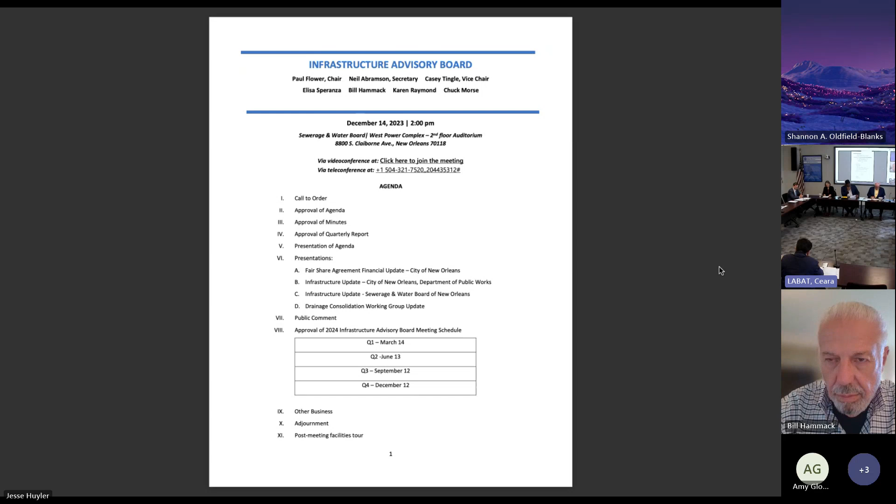Okay, so each of you has the agenda in front of you. If I could have an approval of the agenda. Move to approve. Moved. Second. Seconded, all in favor? Aye.

Aye, the agenda's approved. The meeting minutes are attached in your packet. They were sent out several days ago. I hope everybody's had a chance to read them. If there are no corrections or additions, are there?

And I'd entertain a motion to approve. I'm a motion to approve the minutes. Moved by Mr. Morse, seconded by Mr. Abramson. All in favor? Aye.

The minutes are approved. In addition, in your packet and also sent out to you a couple days ago was our third quarter 2023 quarterly report from the Infrastructure Advisory Board that goes to the mayor of the city, the city council, the governor by executive order. And we also send it to the local delegation, have started to send it to the local senators and representatives in our legislature.

Are there any comments, corrections, or additions to the quarterly report? If not, I'd entertain a motion to approve the quarterly report. So moved. Moved by Ms. Seconded. All in favor? Aye. Any opposed? No. Okay. So that takes care of those items.

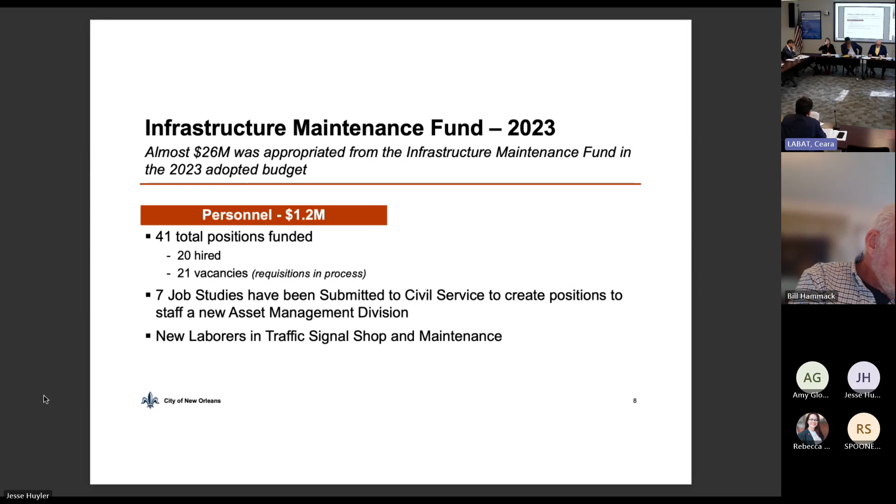A lot of these new laborers are in our traffic signal maintenance shop. If we move on to the next slide, we talk about actual projects we've been funding with the overall IMF dollars appropriated to DPW. Obviously the largest component here has been direct to Sewerage and Water Board. The rest primarily has been going to right-of-way repairs allocated out to each council district, and an additional $1.4 million of that IMF funding is going to improvements.

We can move on to the next slide for an update on the DDD drainage improvement. I know this is a project we've been talking about for a good long time now, and we have work that's actually been started and completed. We had to change the scope of work a little over time due to changes in cost estimates. Since this project was initially created pre-COVID, a lot of the city's construction costs have risen substantially, so in the end we're not able to get to as many blocks as we originally hoped.

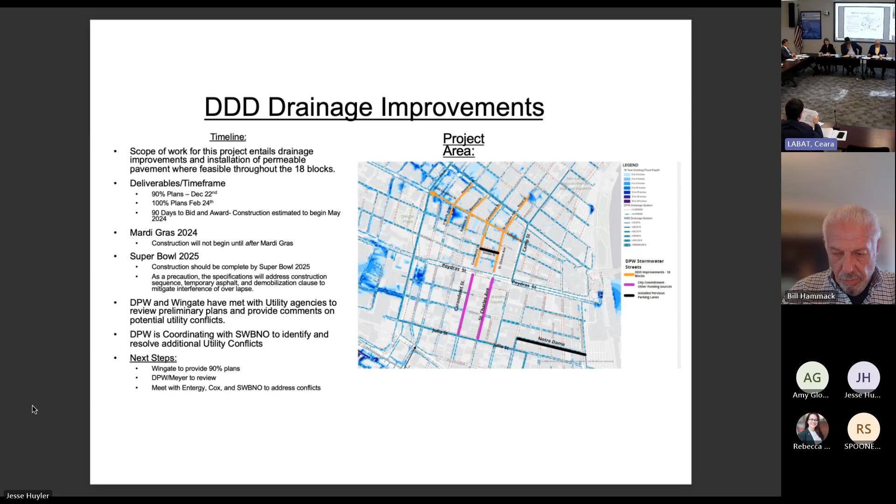Moving on, next slide. One of the hiccups that we've seen that have affected the budget for this project and how much we're actually able to get accomplished have been utility conflicts.

Some engineering drawings are going to show what we're talking about, but one of the largest issues we've seen are existing drainage lines in parking areas. One of the major things we're doing with this project is the parking lanes along those blocks are going to basically be used for water storage, permeable paving, and more or less that would be the correct way to describe it.

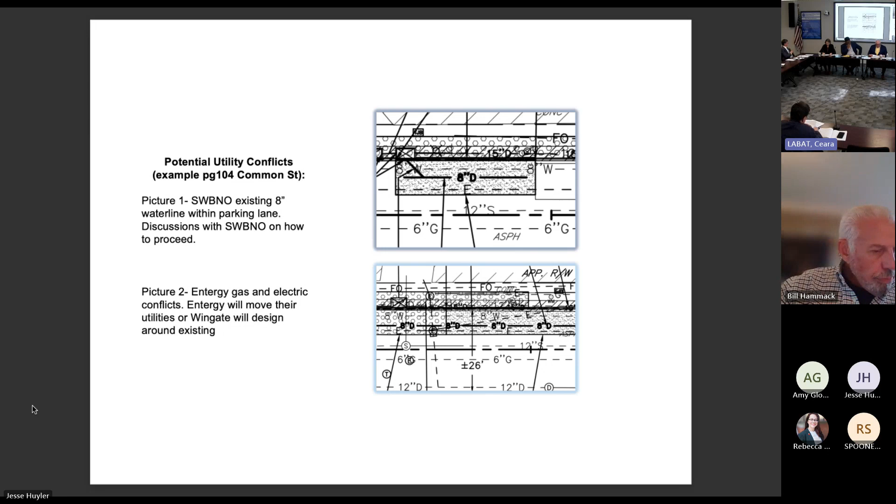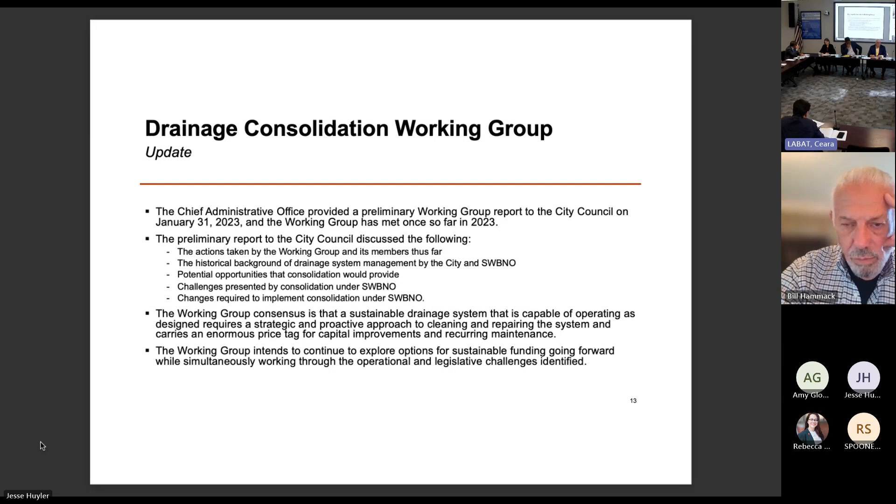We can move on to the last bit, which is the drainage consolidation working group. I don't really have any major updates here. I think the members of this board probably have pretty much the same knowledge of what we've been finishing with this. We haven't made any major changes since the last meeting, as far as we're aware. We have not met the board since the last meeting. With that, if there are any questions I can answer.

I have one quick question. Could you back up to the slide showing the allocations for certain projects in the various council districts? I'm absolutely amazed that I don't see anything in Oliver Thomas's district. District E is not included. As far as I know, this is the information that was provided directly from Joe Threat and DPW on the current status of the allocations here. I strongly recommend you don't show it to Oliver. I would agree.

I was at their board meeting last week, and we were talking about inclusion and equity in contracting for that particular job, because that's a perfect opportunity to make sure it's very inclusive. Oh, absolutely.

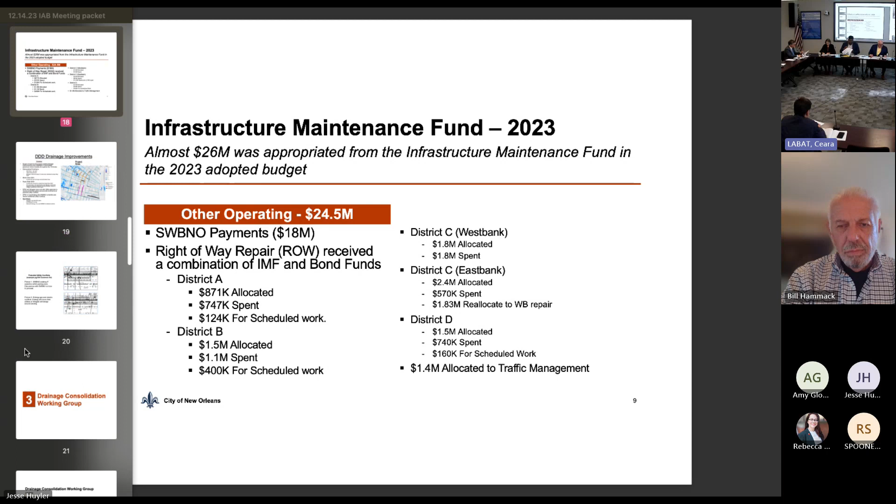Next is item 6C, I guess it is, the infrastructure update from the Sewerage and Water Board.

Thank you, Paul. Good afternoon, everybody. I'd like to start with a welcome and an apology. A welcome to our water plant, we've been really planning this for a while, so we're very excited and elated that you're all here and we get to see parts of the power complex at the conclusion of the meeting. I'm very sorry that Bill Hammack couldn't be here, but we'll make sure you get your own personal tour, Bill, at one point. The apology has to do with the lack of heat. Well, it's gotten better since I got here. Well, the more I speak, the warmer it's going to get.

Given the fact that we're here, I thought we'd take advantage of having more staff available and attending, so many will share the actual updates. So it's less me talking and more them being the subject matter experts. They're going to answer all the questions and speak from firsthand experience about what they've been doing. I think it's an awesome, unique opportunity today.

So with that, we're going to start with Grace Birch, our Director of Communication, to talk about some exciting initiatives she's working on. I echo Ghassan's sentiments. Welcome, everyone, it's so exciting to have everyone here at the plant.

Also exciting, tomorrow we're going to debut a beta version of our pumping and power dashboard. You all might remember we had a saltwater intrusion dashboard that was really successful. After the rain event on December 2nd, we feel ready to, at least in beta form, debut something that Steve Nelson has been championing. It's been a Herculean effort on our IT team and the engineering department to finally put in public form which pumping stations are operational during a high rain or anytime event.

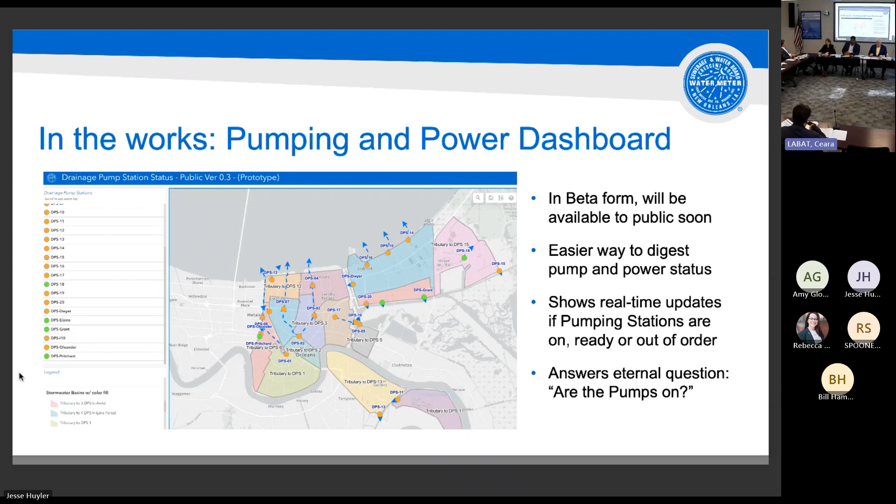We had a great meeting today with NOLA-ready, after talking with them extensively throughout the weeks about how we can better communicate with our partners internally, and give everyone internally that visual cue of where we're at with our pumping and power status.

And with that, Steve, if I missed anything, please.

You say you're in beta testing on the dashboard—when do you expect it to go online, or do you know? We're going to put the beta version online tomorrow. We might live to regret that, but we're going to let the public see where we're at now and get feedback from them.

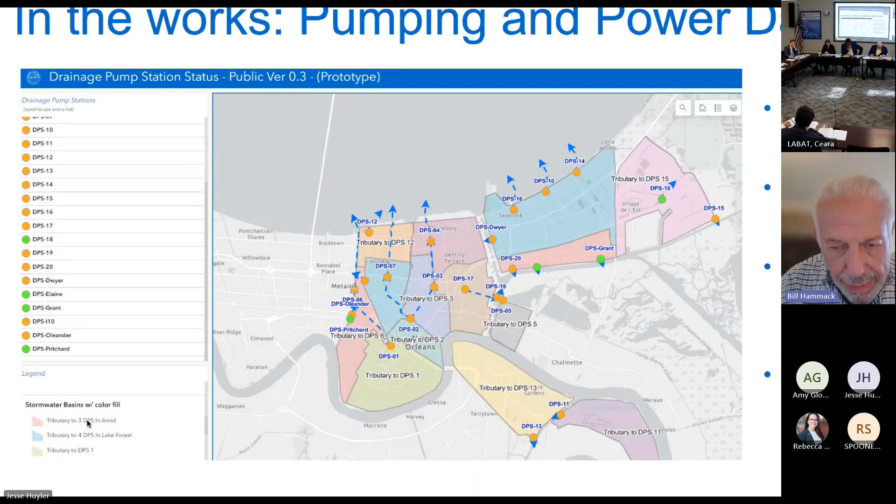Could you go back to the beta slide on the pumping? I tried to blow this up on my computer, but down on the lower left hand there's comments about tributary—am I saying that right, is that what that says? So this is prototype 0.3. We are on prototype 4 at the moment, so that will not be on the new one moving forward.

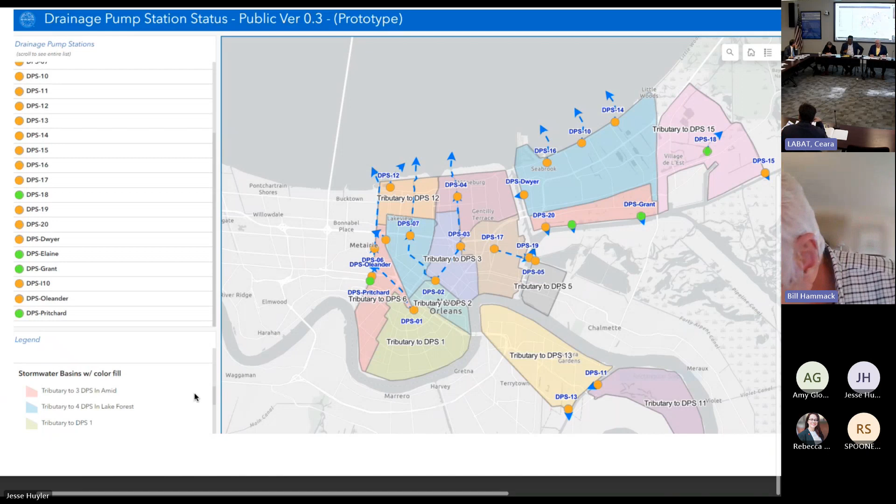My comment was, I don't think anybody looking at this as a layperson would understand what that meant—'tributary.' There'll be many disclaimers and tributary explanations. Even so, it does bring up the point that 'tributary' could be a little confusing too—it might be 'basin' or something more colloquial.

That's perfect feedback. When we first launched our saltwater dashboards, we got flooded with questions, and from that was born an excellent FAQ list. We expect that same thing to happen. Any changes we can make on the actual dashboard, we'll make, but any questions we can answer will live on that page as FAQs.

And that's only a screenshot, Bill. So when you blow it up on that screen, you won't be able to see anything, but the user will be able to blow it up and see exactly where their street is. It's a GIS map powered by Esri, so there's a lot of detail in that map.

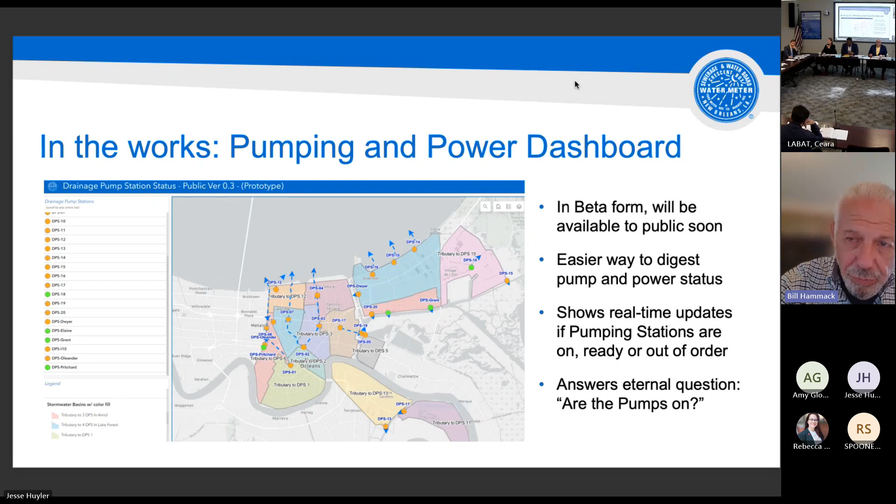I like it. Good for you, that's good. Bill, I was going to say that if they didn't change it, the engineers in the room could tell you what it is. That's my biggest concern, Paul.

Good feedback. On a communication standpoint, I don't know if it's Sewage and Water Board or the city, but I get all the alerts - NOLA Ready and Sewage and Water Board - every time there's a weather event, by email and phone, which is great, except it reminds me of the old hurricane alerts: evacuate, evacuate, evacuate, and nothing would happen. Then a big hurricane comes and people treat it like crying wolf and don't leave.

You can't really predict the weather, knowing exactly when it's going to flood and when it's not, but I have a feeling people are getting into that crying wolf scenario and don't react every time they get a notice, because in many instances nothing happens. We want people to take precautions when they get the notice, particularly if something bad happens. I don't know if there's a way to deal with it, but I mention it because it's happened before with hurricanes - people say 'oh, another notice' and stop taking it seriously.

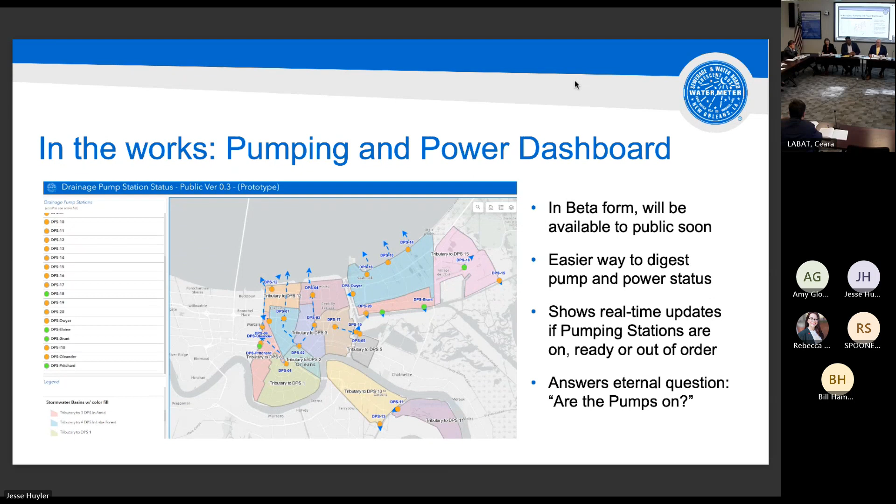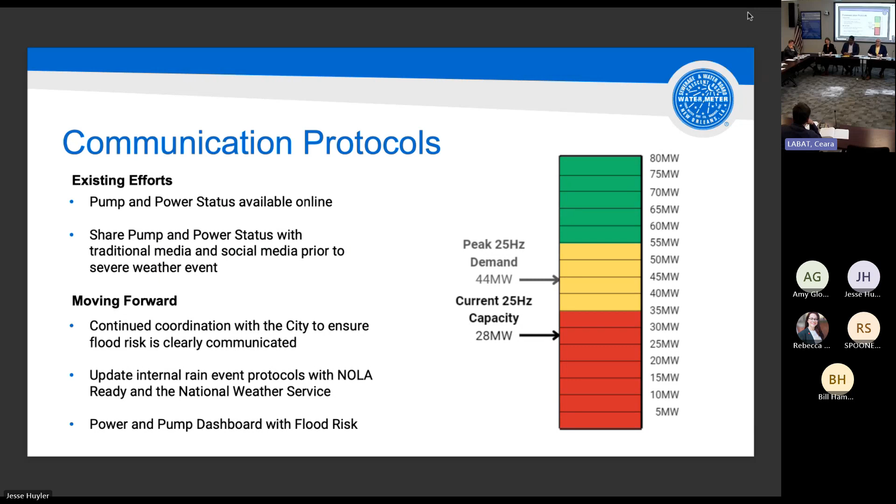My name is Caitlin Timrak. I am our Power Complex Program Lead, and I'm going to talk a little bit about our current power situation to expand on this and go over the Power Complex as well.

As Grace mentioned, we are in the final stages of bringing Turbine 5 back online. Our internal crews have been working diligently, nearly 7 days a week on this, and they've done a fantastic job. We should be bringing that unit online tomorrow. In any scenario, we'll be letting everybody know where we're at, and hopefully we'll be able to move up that chart a little bit.

In the meantime, as we have been and will continue to do, we have frequency changers throughout our system, in addition to several EMDs, which are 60 hertz generators at our facility here at the Carrollton Water Plant. Frequency changers are at a couple different locations across the city. They take power from Entergy or Turbine 6, should we need it, and convert that to 25 hertz. That's what we've been relying on daily for our pumping at the moment.

One question that comes up is, can you just go buy more generators? We actually asked this question to partners and suppliers, and they more or less confirmed that there are no 25 hertz generators available on the market, at least in this country, possibly this hemisphere. So if we did, it would have to be custom fabricated and designed. Generators that were bought after that.

That's what I'm referring to when we say EMDs. There's 5 units, installed in the back of our plant, 3 of which are operational at this moment. Two are out of service, but we have been using them, and we used them last weekend. And yes, they are 60 hertz.

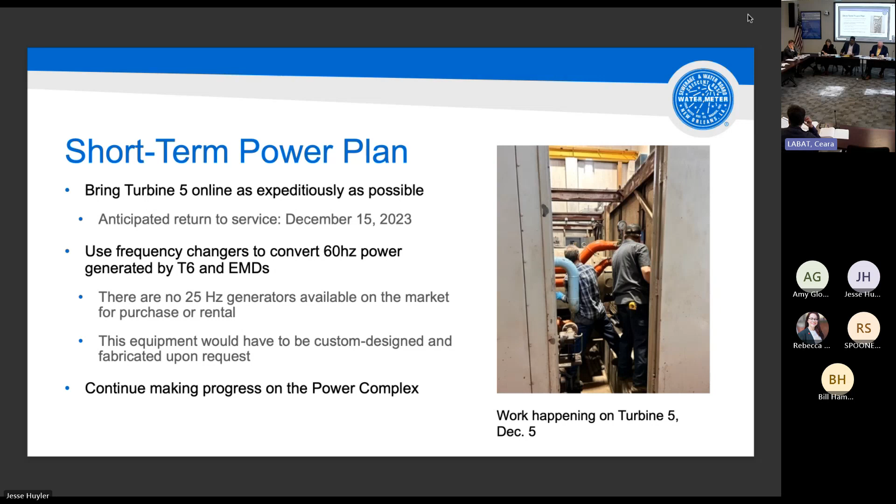So we have a photo here of work on Turbine 5, just an example to let folks know what we're looking at. We'll move on to the next slide.

Ultimately, we recognize that this is just not where we want to be in general, and that's why we made the decision several years ago to move forward with this large investment in the power complex. As a reminder, this will allow us to tie directly into a substation built on our property, which you'll be able to see on the tour today. That will provide our power for a daily basis as well as for rain events, again utilizing frequency converters to take that 60 hertz power from Entergy and convert it to 25 hertz for our pumps. So very similar to what we're doing now, but new equipment, more reliable, more modern.

In the unlikely, yet it has happened, event that Entergy is not available, we have Turbine 6 and the new Turbine 7, which we're purchasing, as the backup. The substation is tied in directly to the transmission line that runs along the side of the property, which is a huge benefit for us.

Question: Turbine 6 and 7, once they get up, can they run the whole system together? About 40 megawatts. The whole system's peak demand on 25 hertz is about 44 megawatts, so it's a little short, but we have the other frequency changers in the system. That 44 megawatt figure was the peak demand from 2019, an actual number we're using. So 6 and 7 provide almost 100% redundancy, but you have other ways to even increase your redundancy. That's right. Good question.

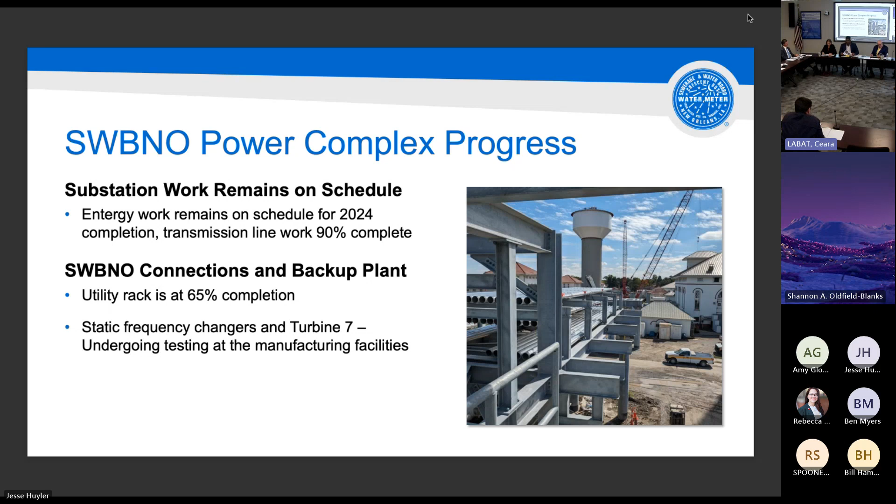And with that, that's kind of where we're at with the power complex. More to come on that, of course, but for now I think we'll turn it over to Steve.

If we were to tell someone in 2025 we're going to have a new substation at the main power plant, what is the rest of it? Which means the pumps won't go offline anymore, or what is the rest of that we can communicate? The simplest way to describe it: the pumps will have a reliable source of power that is likely to be there when we need it. And if that source of power goes down, we're going to have backup power that's equally modern and reliable. So it's exactly where we need to be for the next 50 years.

And just in terms of when the pumps go down, how much of it is power related, how much of it is mechanical? Currently we have 95 of the 99 large drainage pumps working. Invariably you'll have a handful down for maintenance, or they just break down and have to be repaired. So we have not had an issue with pumps not being there for us, with maybe the exception of DPS 12, which is a one-pump station. So if that pump goes down, there's no pumping, even though we have redundancy.

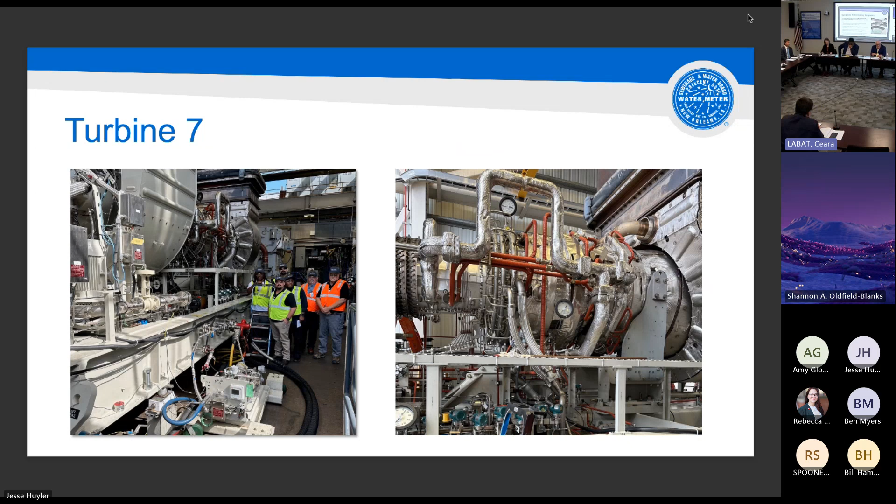Steve: Thank you. I hope everyone recognizes the juxtaposition between the last slide and this slide. We went from jet turbines to something I've heard described as a Roman bath, which you can see if you look out the window here. It's a beautiful architectural structure, very old, from the 1920s, but also, as we were talking about the 25 hertz pumps, very reliable if and when maintained.

IMF funding has been critical in helping us maintain those 28 different filter basins that are out there. Filters 11 through 28, that rehab project was completed in 2023. We have an additional 5 filters that will be part of a construction package we'll advertise in early '24. This is really going to help with our redundancy in terms of the amount of water we can filter so that we can maintain our different filter galleries.

And if we have an issue with our other major set of filters, which is over by Claiborne, we have some ability to cordon those areas off. The next phase of work that's going to be completed at the Sycamore Filter Gallery, SFG, is going to be part of a funding allocation through the U.S. Army Corps of Engineers. We've got a couple of photos here to show some of the things that have been replaced.

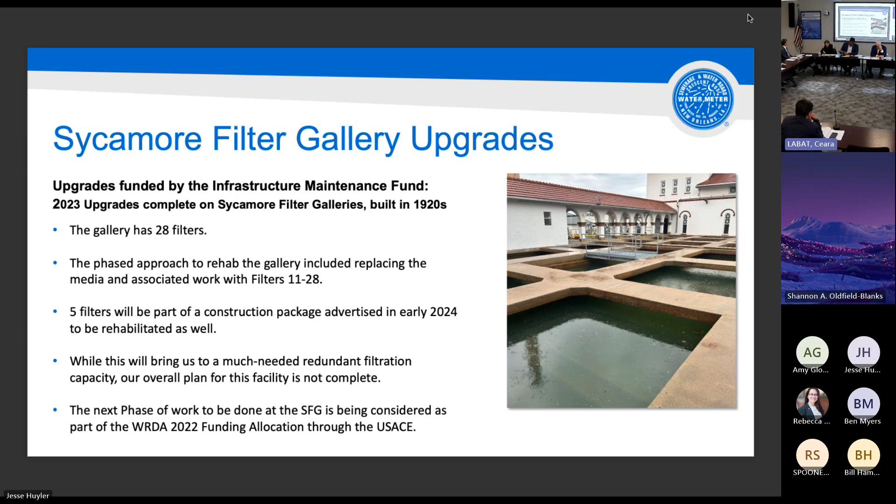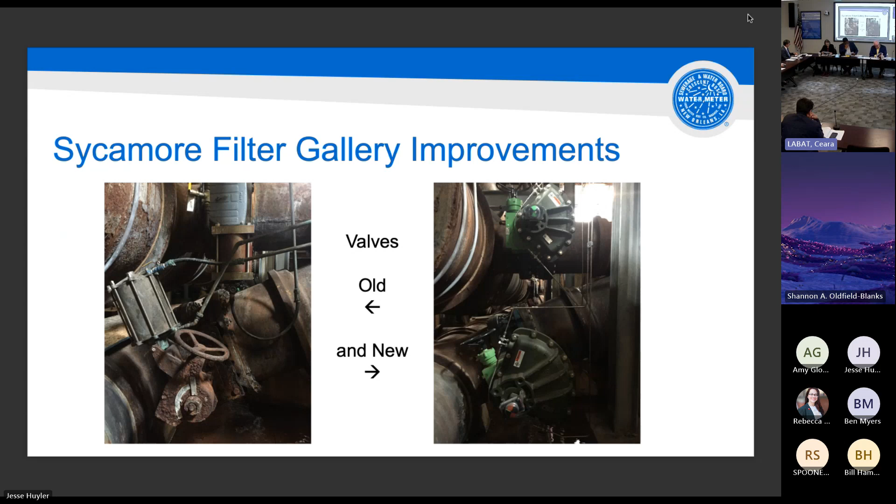We had valves throughout the filter galleries that were controlled by water, which is convenient because we have a lot of water there. But as things leak, it makes for some really unpleasant, if not totally unsafe, working conditions. So our engineering group has put together a series of upgrades that switched those to pneumatic valves. It makes it a lot easier to maintain and a lot safer to work on. You can see in the next set of photos the old tubing and the new piping that's there.

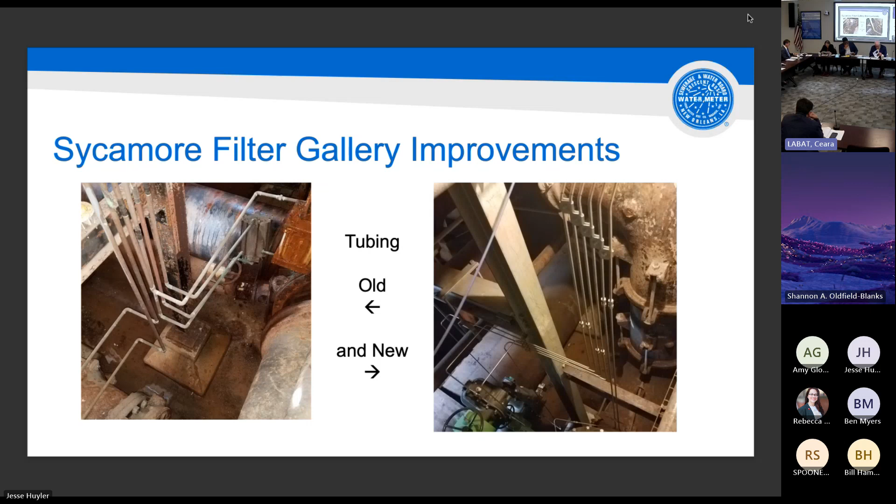We've also done a lot of work with structural steel. If you look at the next photo, there are two in here. This is an example of some steel pedestals that we've replaced, really, really old steel that needed to get moved.

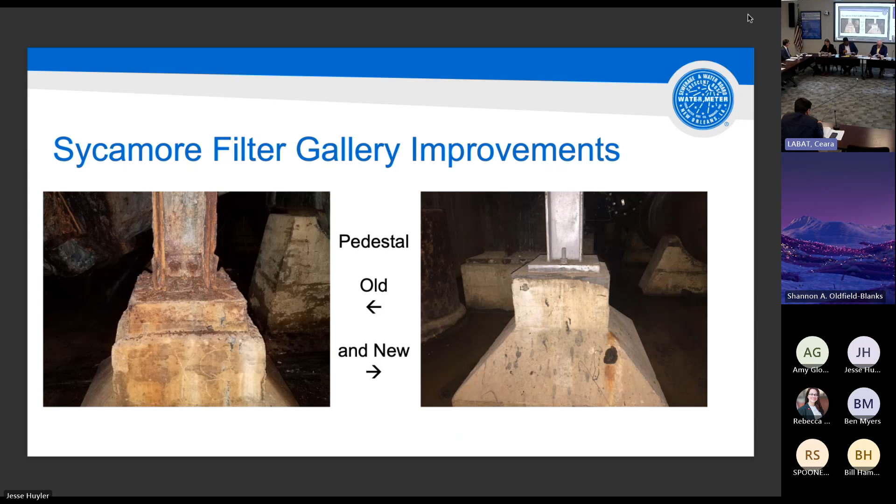The next photograph is a picture of the collection tubes, called Delery tubes. They're basically perforated copper pipes that lay along the bottom of the filter galleries. Then we stack anthracite, which is basically coal, then sand, then gravel on top of that, and that helps filter the water before it goes into our clear wells, which is then distributed into the city. You can see clearly the old and new condition there.

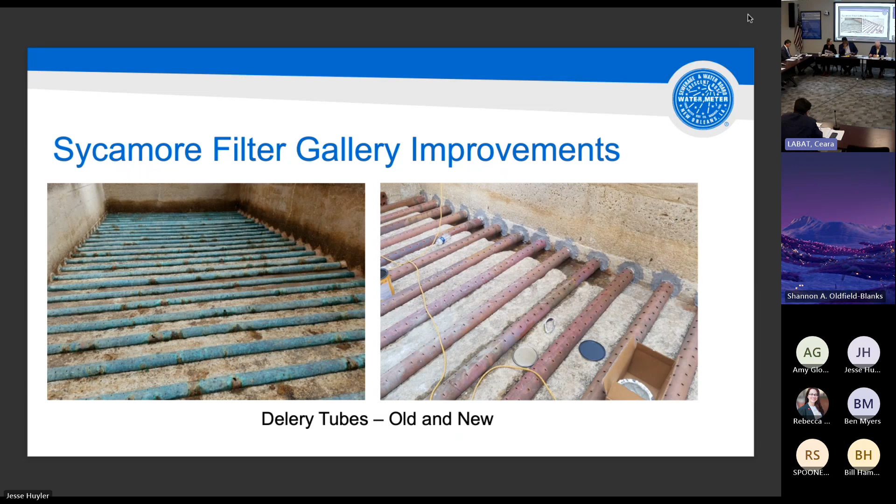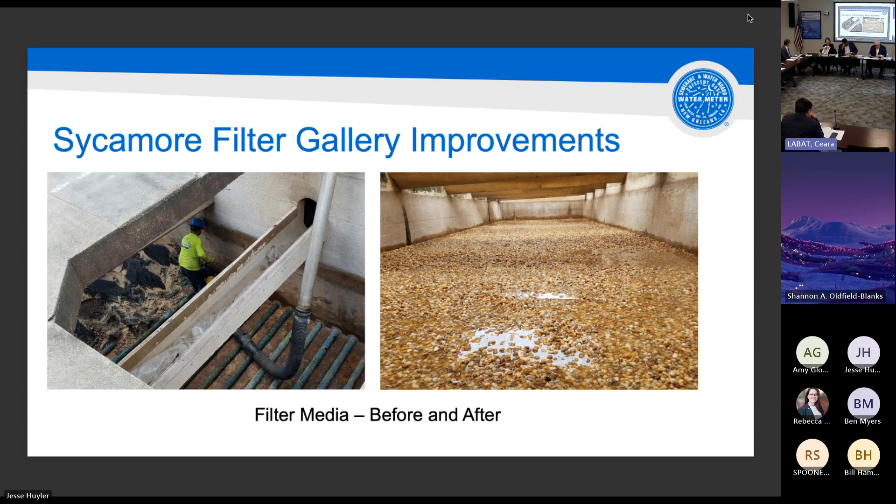Are there any questions about that project at this point? Just a comment—first of all, I've been through that part of the plant in the past, and it was such a safety nightmare for the workers, let alone visitors.

Yeah, and at that time, which is before anybody in this room was in charge of anything, that was my main concern. I tried not to think about our drinking water coming through those pipes. So how much of this upgrade do you feel confident is going to really dramatically increase worker safety on the site?

Well, I think the piece about the ability to even work in those areas, those really wet conditions, that's been addressed. There's a lot of non-compliant spaces—handrails being a big issue, things hanging down. We actually have funding coming in to put in some handrails around those filter galleries, so that work is ongoing.

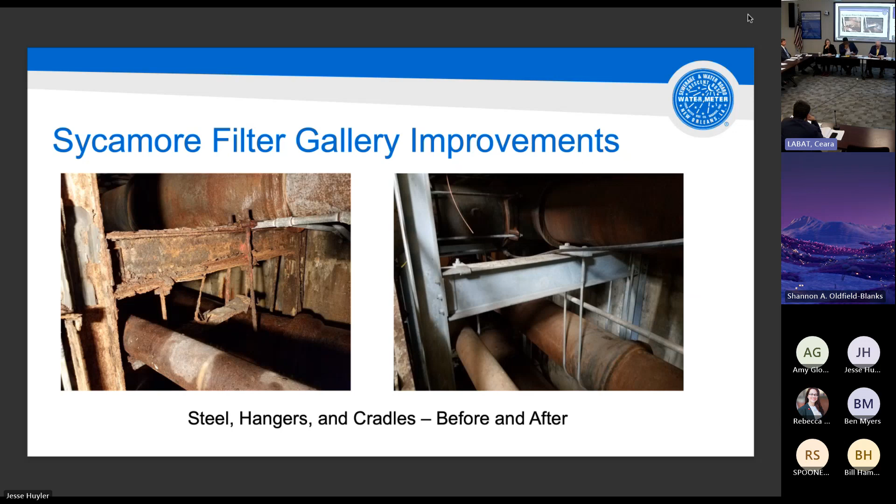As far as a percentage, I couldn't give you an exact number, but it's something we're definitely going to be focused on, and it's going to be a key component of the next slide, which is a great transition into our water quality master plan, currently in progress. CDM Smith is the apparent contractor, the consultant that will help us with that. That's exactly part of what we're going to be looking at—life safety and worker safety—because if you've got a safe environment, it's easier for folks to show up to work. They feel more comfortable, we can be more productive, and that adds itself.

That process, I have towards the end of the year. I think our January board meeting is when the final approval is going to be for that scope of work. It's an 18 to 24-month process, and it could not come any sooner. The regulations coming up from PFAS, PFOS—those forever chemicals everybody has heard about—as well as the lead and copper rule revisions are going to add some really serious operational parameters and considerations for us. And all of that, coupled with the saltwater intrusion we've experienced this last year, are going to be really important considerations for CDM to help us address and lay out a series of upgrades and operational parameters.

That'll help us set the stage for the next 50 years with the plan. So if I can put it in my language, to make sure I understand: this is a study by CDM Smith to help you work through what needs to be done to modernize the water plant. Is that a fair way to put it? Bring new technology to how we purify water, yes.

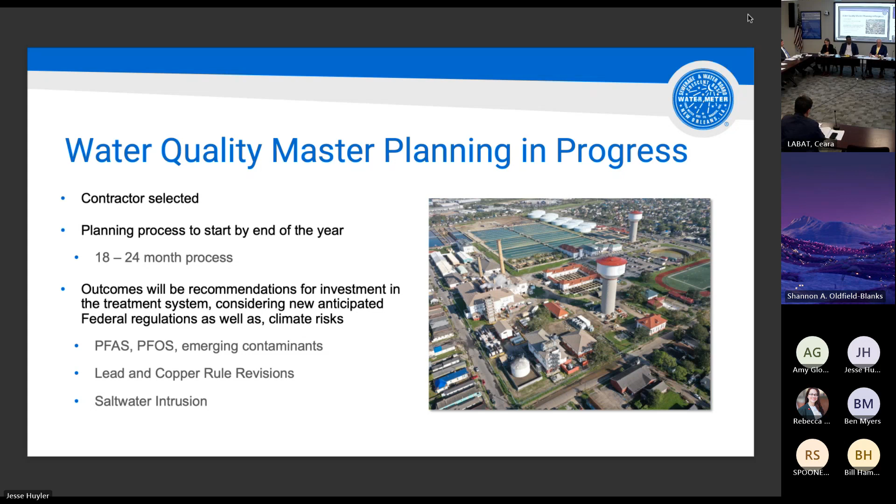So I'm going to be talking about smart metering. We are officially well underway in our intentional slow start. Right now, fresh off the press as of this morning, we have 864 meters in the ground. 92% have a callback rate, which is a very high number for our slow start installation.

The 92% means that 92% of those meters are actively getting hourly reads in our system. The others are connected, but that 8% reflects that it takes 3 days for us to say it's an accurate connection, so we have to wait for 3 days of reads. Since this is as of this morning, that includes some of those numbers. Contractually, the goal is a 99.2% required callback rate, so it's a pretty high number in our contract.

We also have 325 smart meters that our internal folks have connected with a radio and are fully calling back. There's a larger number there - 2,200 meters are our new designed meters, but not all of them have the radio attached yet. That's what we're doing now, attaching the radio and connecting them into the system. The reason we didn't have the radio yet is because we didn't put in the radio until the network was up. Now that the network is up, we're going back to those locations.

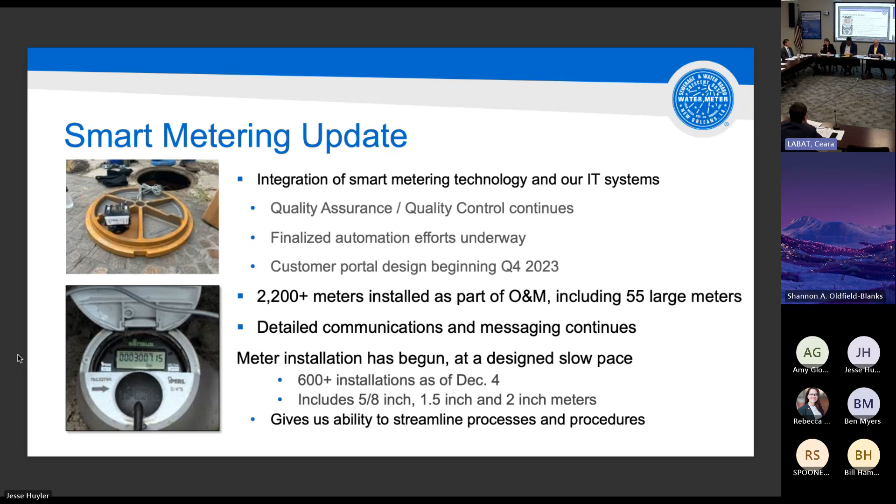Great, it's very exciting. Any other questions on this particular slide? Are we moving on? I mean, moving on to the next topic - are we going to talk about the water programs at all? Never mind, just go ahead. Yeah, the water piping - it's not part of this today.

And I think the really important piece is not 1,000 - the goal is to get to zero, because that will allow us to have the average response time go from 100 days between making a hole and filling it at the beginning of 2023, down to 2 to 4 weeks, which is getting in line with an industry standard. I think we've all heard about the issues and complaints, we've all seen them as we've driven around, and I'm really pleased at the direction this is heading.

This is part one of a two-part issue, the second being our internal crews being able to keep up with that paving. As of the last 4 or 5 months, they've been able to do between 60 and 100 cuts a week, which is keeping pace with the holes we're making. I'm really proud of our internal network crews and very thankful for IAB's participation in what is clearly an effective effort in getting this backlog down to zero in 2024.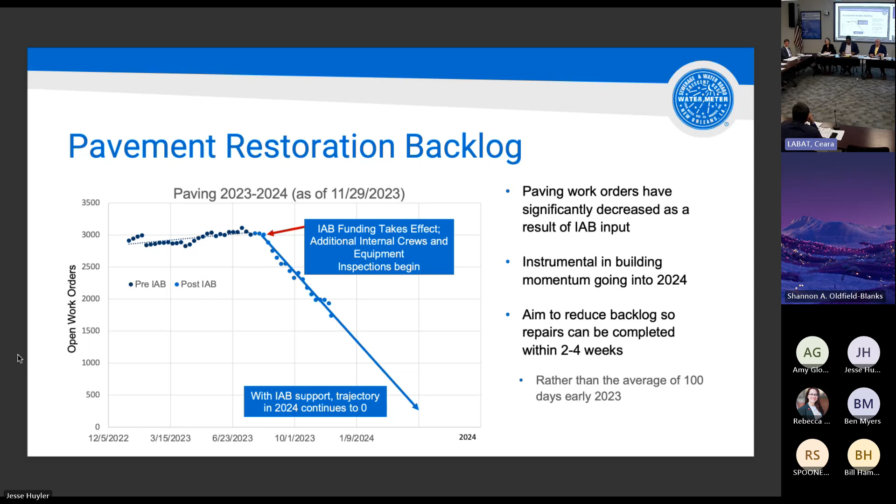I'm going to highlight the financials on our slides that we normally share with the board. Our top line revenue from the fund is up to 53.1 million through the end of October, and our total expenditures paid out using the IMF funds are at 17.5 million. So it's been very beneficial. Again, we've been working through our budget season for '24, so this fund is really helping us plan for projects.

We have allocated about 40.8 million to contracts, which are detailed on the pro forma slide. This last quarter we spent around 900,000, primarily on the first four: the Sycamore Filter Gallery, the T7 project, smart metering, and the power complex. Things are moving along nicely. As we mentioned earlier, the additional 5 million for '24 will be applied for in January.

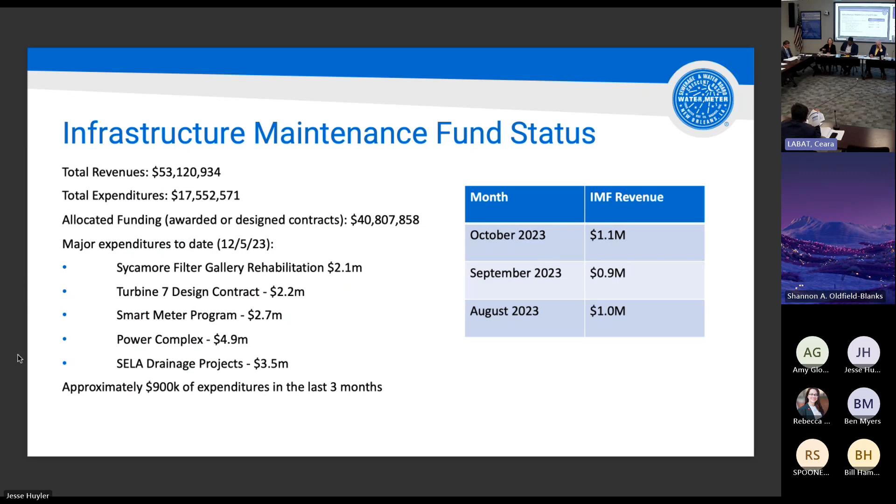On the next slide, we requested five projects for fiscal '24 for the board's approval. It's a continuation of the Sycamore Filter Gallery that Steve was talking about, doing additional filters with this $3 million. We have 1.5 million for the CDM Water Quality Master Plan and Strategic Plan, and $6 million for a new project - replacement of the new river intake fender system. This has been on the project list for several years since it was damaged by a boat back in 2016, and then hit again. There was structural damage done to the fender system that protects the intake - a very critical thing, as we learned, during saltwater intrusion into that intake. To get the protection that's needed, this $6 million will go to rebuild that, and we believe this will be a very beneficial project.

We want another 4 million for the pavement, yes, to continue that trend that was shown - continuation on the paving. And then the 200,000 is related to the continuation of the stormwater fee analysis that Raftelis is working with us on. Okay, so I just want to make sure I understand - it's 10.

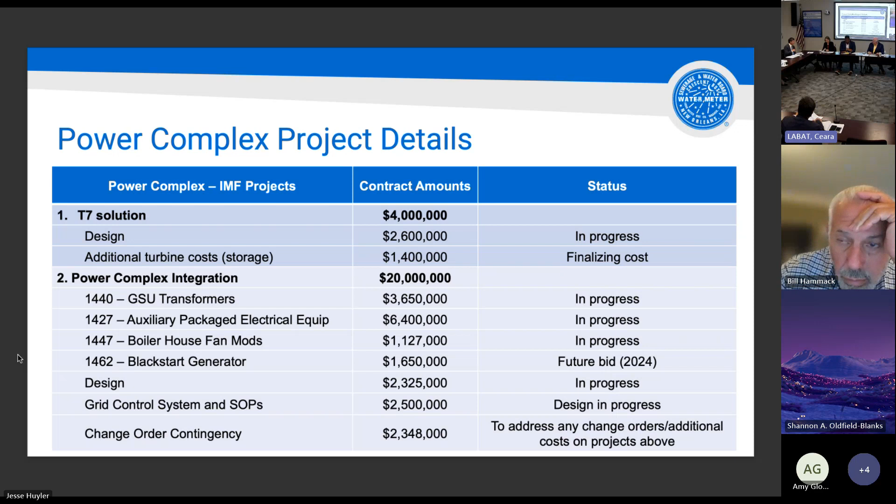Just if I could, Paul - we have this cash on hand, or pretty reliable cash flow. I think the sooner we can deploy it and get it into the hands of these important projects, the better. So I'm absolutely in favor of it.

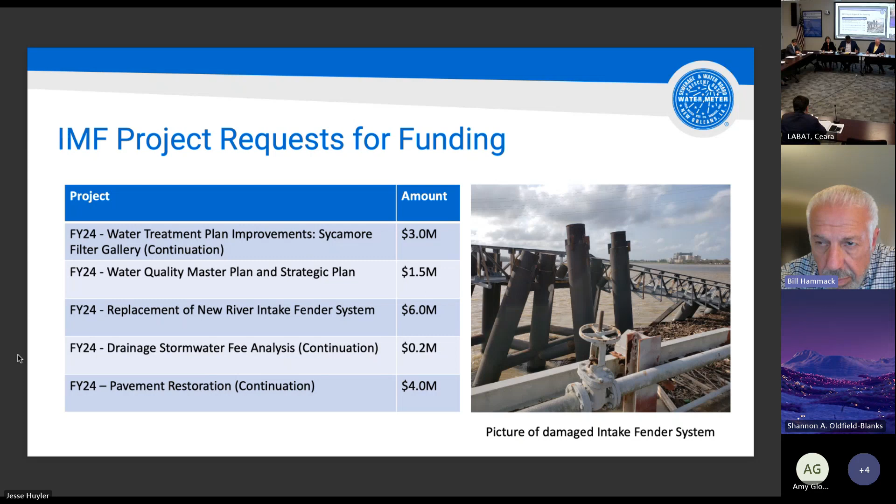We have a list of potential dates for our infrastructure advisory board meetings for next year: Q1, March 14th; Q2, June 13th; Q3, September 12th; and Q4, December 12th. I'd like a motion to approve those dates.